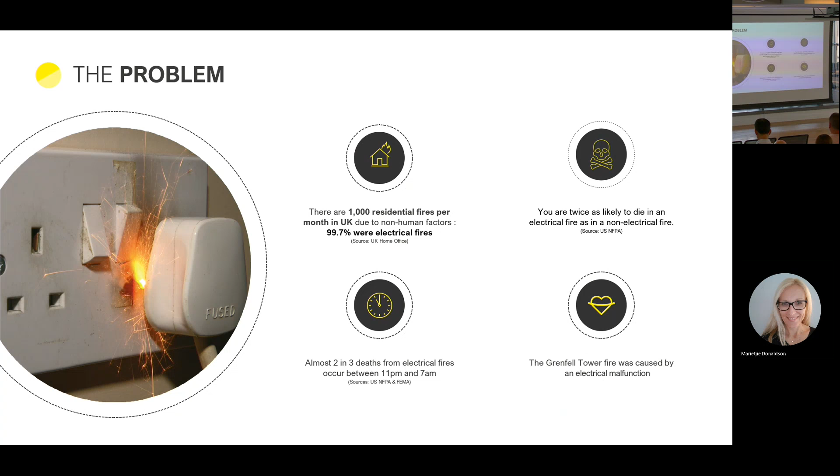The main thing that we're interested in is the things that cause fires between 11 p.m. and 7 a.m., because that's when you're most likely to die from a fire. So what is that human activity? Because all fires in residential buildings, one way or another, are a result of human activity. The human activity is obviously electricity. The main thing is electrical overheating. And there's been a lot of well-funded studies on it. Electrical overheating is caused by high resistance and loose connections.

Okay, fine. Resistive heating or ohmic heating is not detected by arc fault devices. They're not designed to detect it. And of course, arc fault devices don't go below 2.5 amps anyway. And you can certainly raise the temperature of a socket or plug to 480 degrees in 10 minutes with half an amp. So it can be done. The most dangerous appliances from our point of view are the cooling and laundry devices, which are higher amperage. So fridge freezers, dishwashers, electrical vehicle chargers.

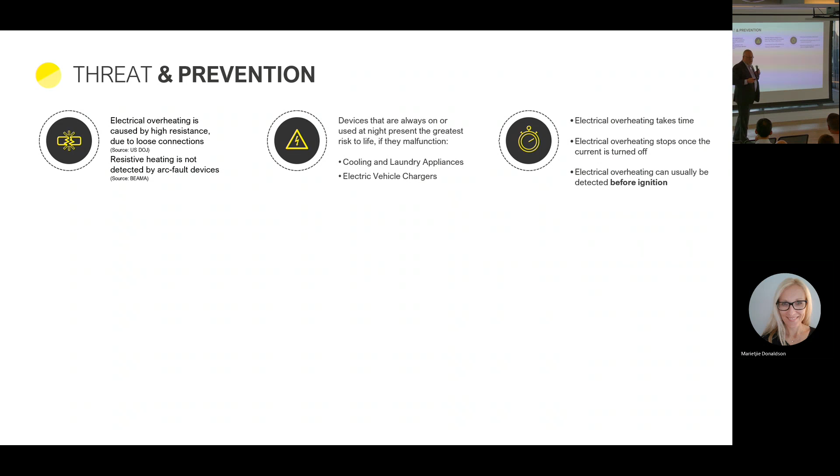The thing about electrical overheating is it takes time. It rarely happens catastrophically, and it can be detected from a pre-ignition perspective, and it can turn off. If you turn off the current, you obviously turn off the electrical heating risks. It's the current that provides the heat. So how do we do that? Very simple concept. We're here, prevention. We are a prevention system. We are not a protection system.

Of course, we can integrate with traditional fire detection systems, but over here, you have two main ignition points that we're concerned with. The auto ignition point of a cellulosic material, and particularly the auto ignition point of hydrocarbon or thermoplastic, which is what your sockets are made of. Over here, when you start to heat these components, you release hydrogen chloride, you release carbon dioxide, you release carbon monoxide. These are all released at temperatures where there is no danger of a fire happening in most scenarios. What we do is we put those sensors within the electrical supply chain. They sense the risk, pre-ignition, they turn it off.

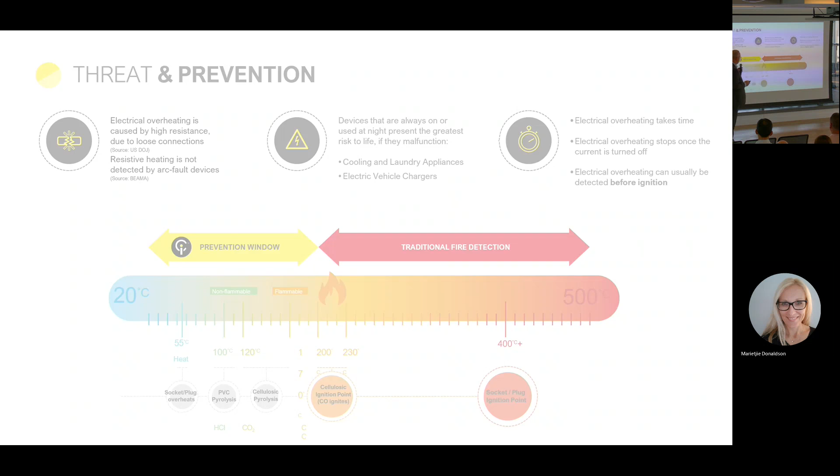How do we do that? It's not rocket science, socket science, right? That has got 5 computers in it. The people who built it built the train tracking system that's working right now in Network Rail that keeps people from crossing level crossings when they're not supposed to, like when there's a train around the corner. It's an incredibly safe device. It's got carbon monoxide detectors, carbon dioxide detectors, thermal, all sorts of things.

It detects current, which means it can detect if current fluctuates up or down. So for example, if there's a resistance on a circuit caused by corrosion or oxidation, we will pick that up in multiple ways. We'll pick it up from the electrical change, purely in terms of current or voltage. But obviously, if it starts to heat, we pick up heat. We pick up hydrogen chloride.

Why hydrogen chloride? Almost all electrical insulation has PVC. PVC, when heated, gives off hydrogen chloride. And it's pretty much the only way you'll find hydrogen chloride in a normal environment. Carbon monoxide and carbon dioxide follow very soon thereafter. From a high-rise point of view, first, and these solutions are patented, so that is a UK patent granted. We're rolling it out to 50 countries.

Something here that's also important is having the ability to do all of this locally. So there's a lot of machine learning built into that socket. It can do what it needs to do locally, but it's also part of a connected system, hence the name of the company, which has a cloud platform behind it. As well as having all the safety stuff, we also have nice stuff that your consumers or the people who live in your buildings might like: the ability to turn off all their devices at night and then have them turn on again automatically in the morning.

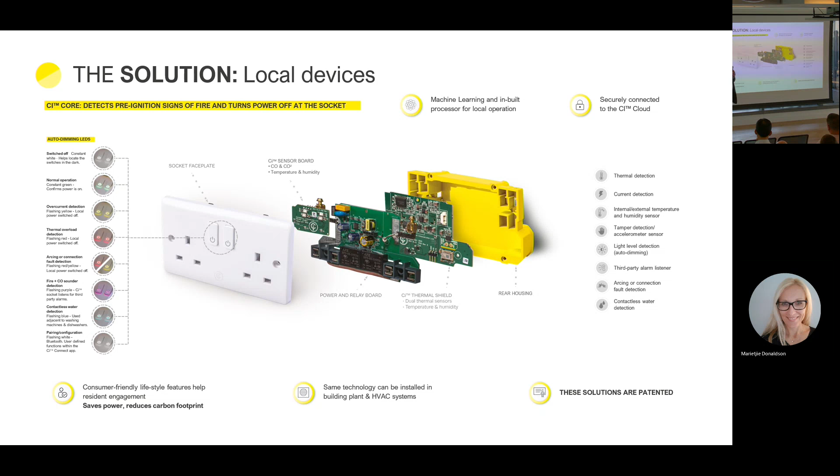I'm going halfway down the M4, have we turned off the hair straighteners? Oh, I don't know. I can go onto an app, I can turn off the hair straighteners. That's all for free. We're not interested in that from a business perspective. We're interested in saving lives and stopping buildings from being burned down. But it's a good way of engaging residents because residents like cool stuff and building owners like buildings that are safe.

So what's behind it? There is a very powerful network behind it. It is a secure network, it's private, it's encrypted, people are not going to be able to hack the building. It's self-healing: it's a full mesh network, so if it loses a device, it will simply re-elect other leaders and keep communicating. There are no single points of failure. It can integrate with Alexa and Google Assistant and Siri.

Ultimately, it goes back to a cloud. The model is very simple. We connect the world up, a socket at a time, and we point it back to a cloud. That's it. But every single device always makes its decision and performs its prime function on its own. So it can always act independently. So if it ever loses connectivity, it will still function, which is key.

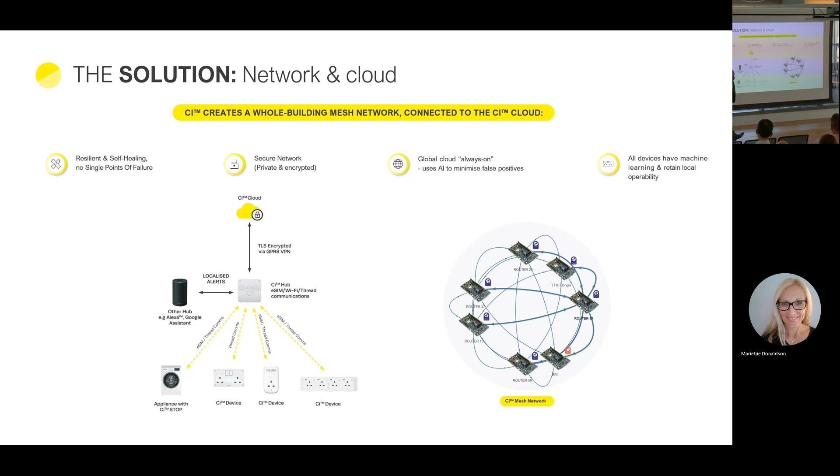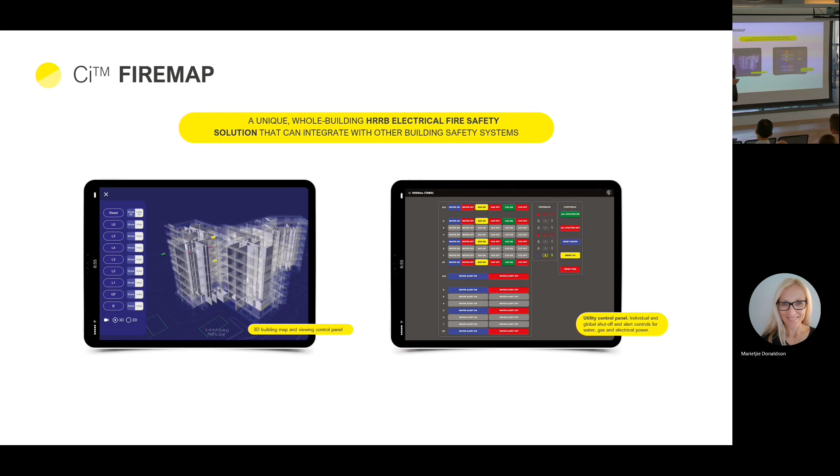We then turn that into a solution that allows the fire brigade to turn up to a building, have a digital footprint, be able to see where all the fire devices are, ours and others that we integrate into, and be able to turn off utilities and evacuate based on whatever their policy is. That's a live system. We demonstrated it to Grosvenor and other industry experts about 4 months ago and got very good feedback. This has been built. So it does work, and we would love to show it to any of you at any point in time down at CIHQ.

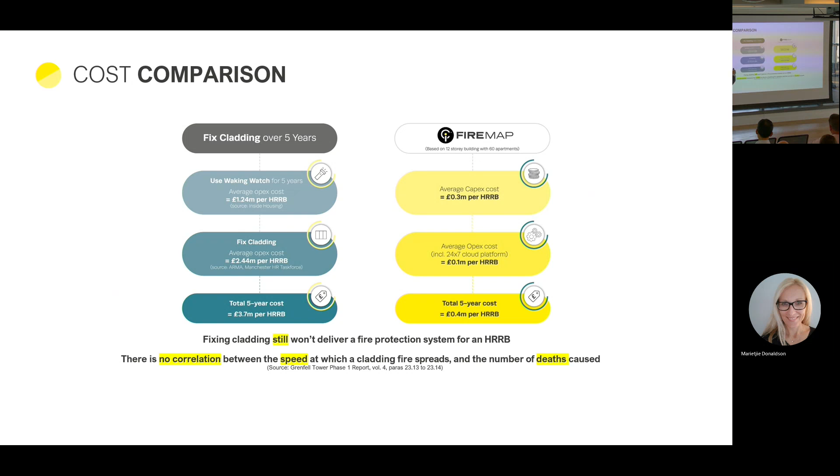Our founder, Anthony, has got 30 years working for the Home Office. He's done stuff I can't talk about, but he was the first person to put ANPR in. So if anyone ever got taxed for ANPR, it's his fault. He has also built the train tracking system used by Network Rail. That level of technology has gone into this pure socket. It's £1 a week per socket for 5 years, approximately 10% of the cost of putting in cladding.

And that is it, I think, Marcus, before you gave me the hook. Thank you. Slightly over. No. So, guys, any questions? I'm sorry I've had to rush through there, but there you go. I'd love to have some.

Please. Cost implication between your socket and the average socket? So there is no easy comparison there. A normal socket you can buy for £3. Ours doesn't actually have a retail price because it's not delivered in that model. It's a subscription. We deliver a solution and we charge a subscription over 5 years because behind the socket is the cloud and all the monitoring, but it works out at roughly £1 a socket, for which you get something that can do amazing stuff for consumers.

They can have all the lifestyle things of the world's best smart sockets. But at the same time, behind the scenes, it's also saving their life. That's key. What we've discovered in our testing is the consumer and the resident loves the functionality. They don't really think an electric fire is going to happen to them. But of course, electric fires happen every day, 30 of them a day. So that's trying to engage them and at the same time address our core function.

You mentioned during your presentation that the fire service, if they were to turn up, would be able to identify. Is there a control panel, or how would the fire service? Yeah, absolutely. There is a cloud app sitting on a very secure cloud to which the fire service would have access through a normal laptop, an iPad or a mobile phone, which would enable them to see what their portal access gives them: a digital floor plan of the building, where the people are if we want to, because we can do that, where the fire is, where the sockets are. Then a gold commander or the bridgehead commander can make a decision: I'm evacuating this floor and everyone else stays put.

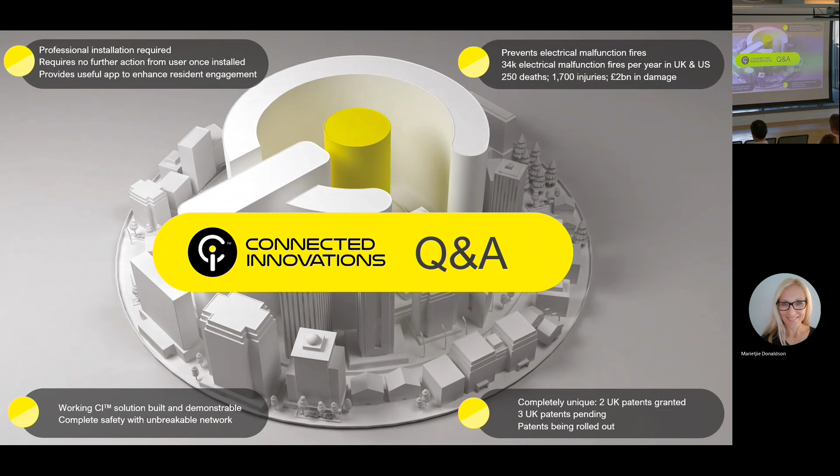Swiftly moving on, we have Say Property, I believe, is next up. The reason the mic has suddenly appeared is we can't record it without, so I'll hand you that. Will you give us our minute to go countdown as well? Yes, of course. I'll be at the back making strange hand signals. Perfect. Is it just this? Perfect. We are ready? Yeah.

Hi, everyone. I'm Kemi, I'm an associate from Say, and this is Charles, he's a partner from Say. And Say, for those of you who don't know, is a property management consultancy firm. And we're kind of here by accident, if we're honest, through our consultancy work with public and private sector developers, landlords and investors. But through our consultancy work, we've discovered that actually there is a need for a tech solution to respond to the Building Safety Act requirements.

So here today we are searching primarily for funding. We need 1.5 million to build Securo, which is our tech platform. But secondly, and most importantly, we're really keen to collaborate and partner with ideally a residential owner or manager, or a tech investor, so that we can build and launch Securo and make sure it's the best platform for the wider market.

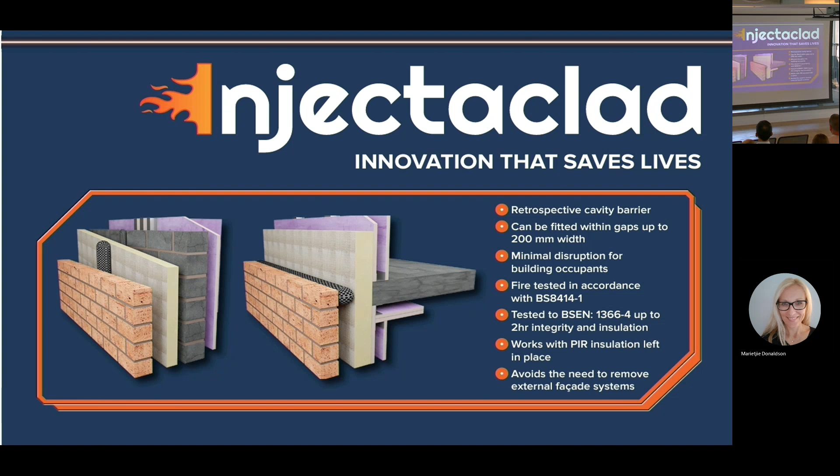Where has it come from? I suppose there's well-documented cladding issues, which all kind of revert back to the Grenfell tragedy. Following that there's obviously been a lot of reform, and EWS1 certificates have kind of been born from that tragedy, and defective cavity barriers, or non-existing cavity barriers, have been found at the same time as looking at the cladding. That presents obviously a danger to residents, which is fairly obvious, and there's a financial impact to the builders and a financial impact to residents as well. So we decided to take a look at the defective or missing cavity barrier. Obviously defective means the existing barrier is in situ, but it's not fully in compression - it doesn't span the entire width of the cavity. And missing is obviously that there's no cavity barrier at all in the void.

So at present there are two main options. One is a full-scale removal of facades - we install, or anybody would install, a cavity barrier and then rebuild the property, which obviously presents major challenges. And two is Injectaclad. That's as far as we believe - I know there is potentially another option there, but it's generally poo-pooed a lot by fire engineers, so we haven't included it on this slide.

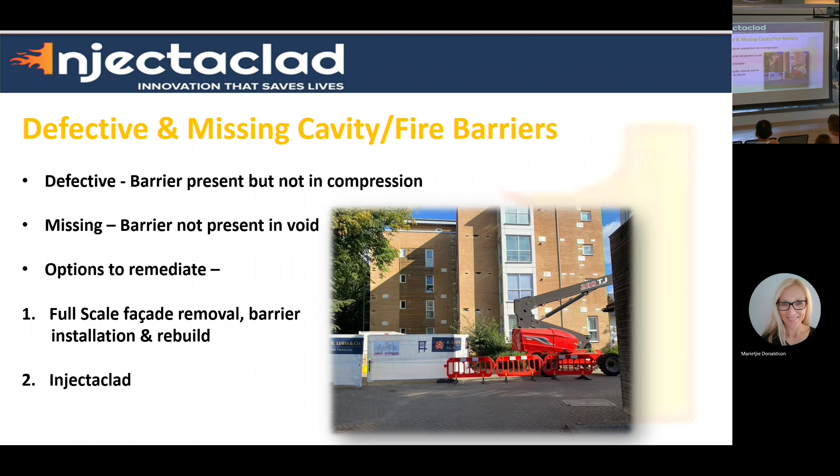So I've talked a lot about Injectaclad, but I haven't actually told you exactly what it is. So it is a retrospective cavity barrier. It's a high expanding intumescent graphite. So on this diagram here, it would be the black element that sits between the brick facade and the insulation. The product in its raw form is a liquid, which allows the injection method. So it allows the product to be pumped into the cavity.

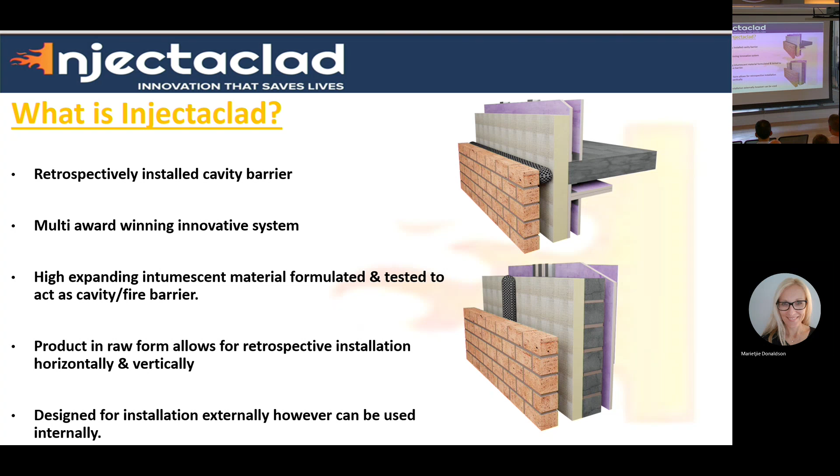And it's designed crucially for use externally, so it can be installed externally. So it's not going to have detrimental effects to the residents. And important for us, and a bit of a tip of our cap, is that it's award-winning. So the regulatory body for passive fire protection is called the ASFP, and it won Innovation of the Year with them, along with a few other construction excellence awards as well.

So how does it work? So if we take a brick facade, we will remove 2 bricks every 2 meters instead of a full-scale brick removal. We install stainless steel pins, which I'm not sure if you can see, but they're there just to hold the mesh in place. And then we put the mesh onto the pins and we pump the mesh, kind of like filling a sausage, essentially. And then that product will sit exactly at the compartment line for the life of the building.

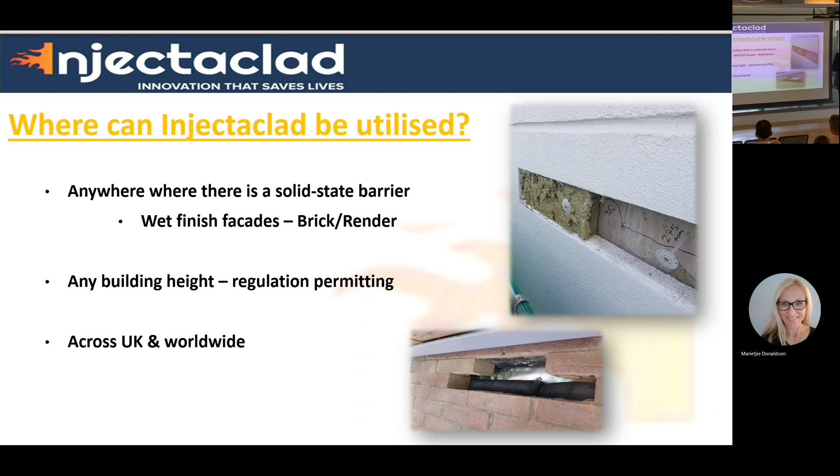So where can it be used? It's primarily what they call a solid state barrier. So it's for use in wet finish facades, so brick or rendered block. It can be used at any height. So we've done projects from 5 meters high up to 45 meters high so far. At the moment, our patent covers us for use in the UK, but we do have a worldwide clause on it as well. So we are looking for opportunities worldwide at the moment.

So why would someone choose Injectaclad rather than the full-scale removal of the facade? So it's highly unique. It's the only thing like it in our little tiny bit of the fire industry. It's vastly more efficient because it causes a lot less disruption to residents. You don't have to decant residents and move them into different buildings. The residents can stay where they are. And because of that, the speed makes it a lot more cost efficient.

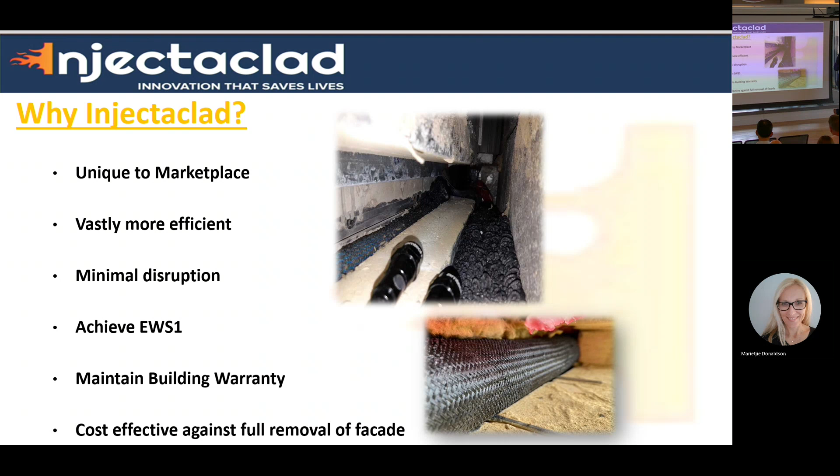Crucially, the landlords can maintain the building warranty by using our product. I believe the building warranty is revoked or needs to be renewed if the facade is removed. And on most of the projects that we've worked on, as a result of our works, and not solely our works, I'm sure, the crucial EWS1 form was achieved.

So testing, I'm not going to go too much into detail on this, but suffice to say, we test our product a lot and we test it with very specific parameters. We don't just say we have a barrier that will last for 2 hours. We test it alongside various different types of insulation and different thicknesses and widths and all sorts.

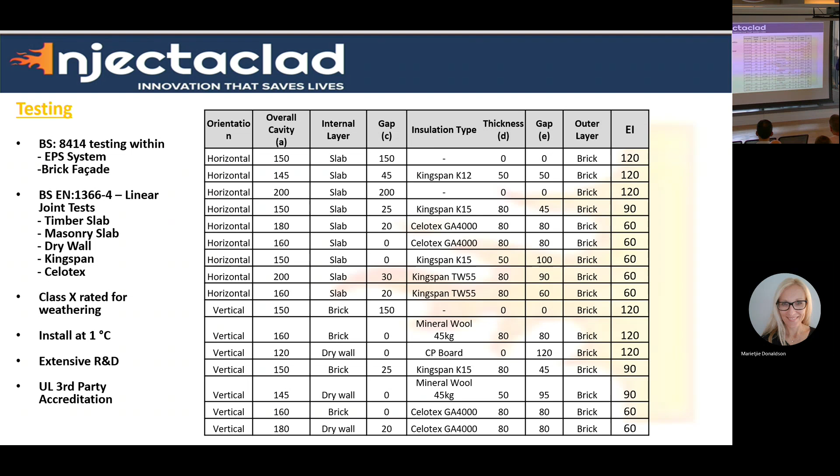There is a vetting procedure, and we're quite selective with the contractors that we work with, because we need to make sure that the product is installed exactly as it should be and it does what it should do. Yeah, I mentioned the awards, but it's always nice to put it in there twice.

So in summary, we have a highly unique product. It's a completely new method of installation. We've completed probably over 60 test scenarios now, all at recognised test houses to the British standard, and we believe it solves what is fast becoming, along with cladding, a major national issue.